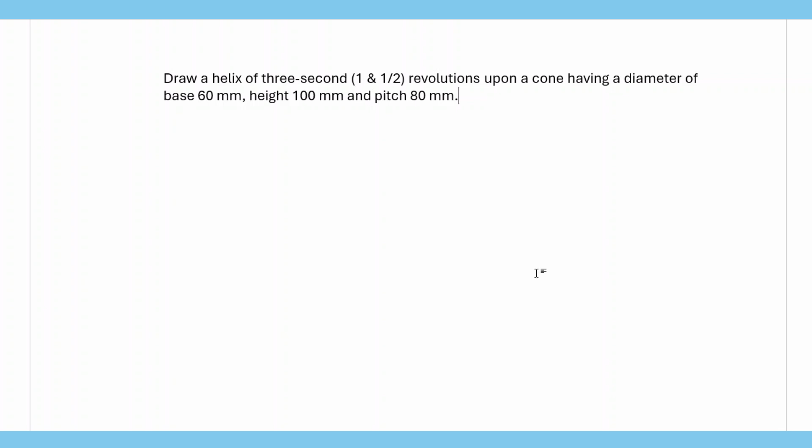So such a cone will look something like this. The base diameter, we said, is 60. The height of the cone is 100, and the pitch is the axial advance when you go through the revolutions stated.

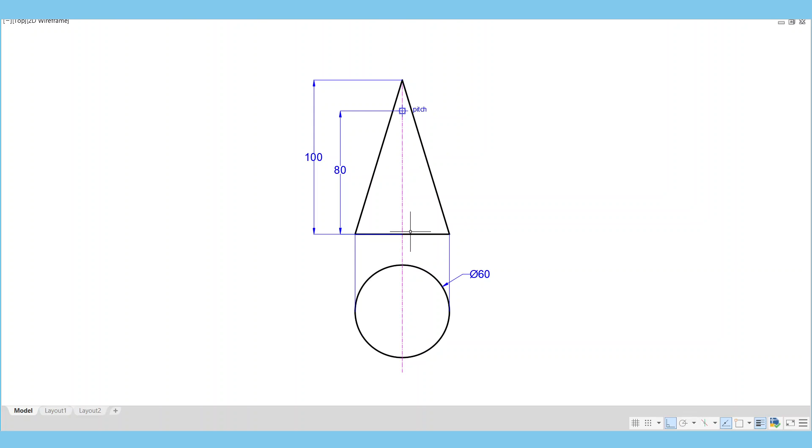In this case, our helix is not going to start from the base and end at the apex, but rather it will end at the point where the pitch, small p, is located. Very important: the 1.5 revolutions is going to fit from the base till the position of the pitch. So we can now begin.

With your compass in a radius of 30, you can draw the circle. We have the base in place, so we now can go ahead and draw the front view.

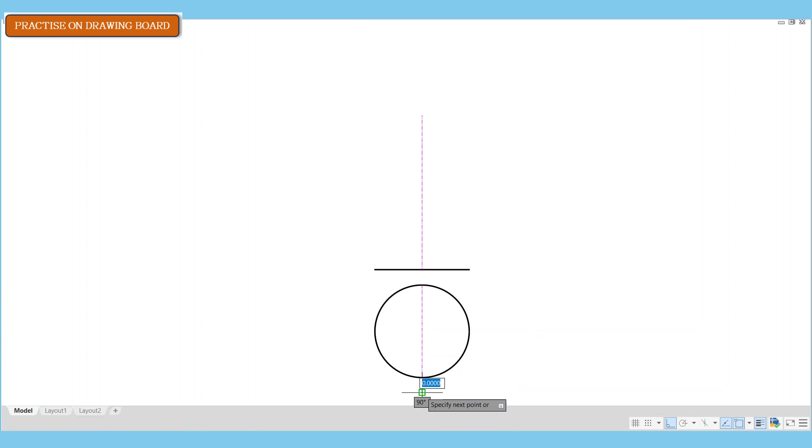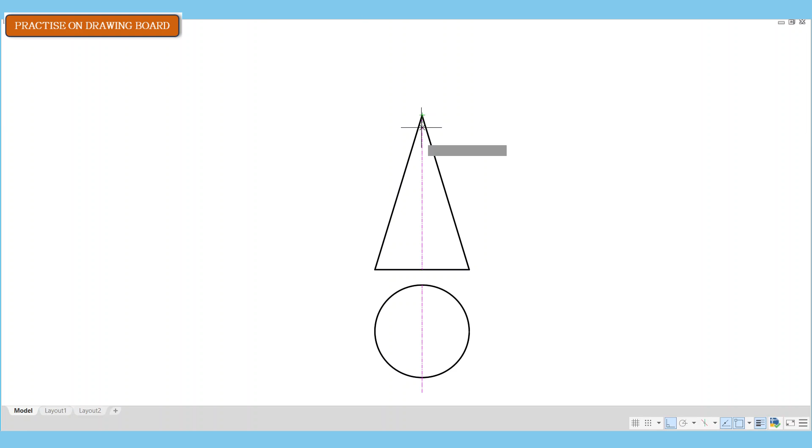Now we'll have to locate our point P. We know that the point P is 20 millimeters from the apex. So this is where our point P will be located.

So you'd see that if I measured from the apex to the point P, where P here is the pitch, that will be 20. So that's where you position your pitch.

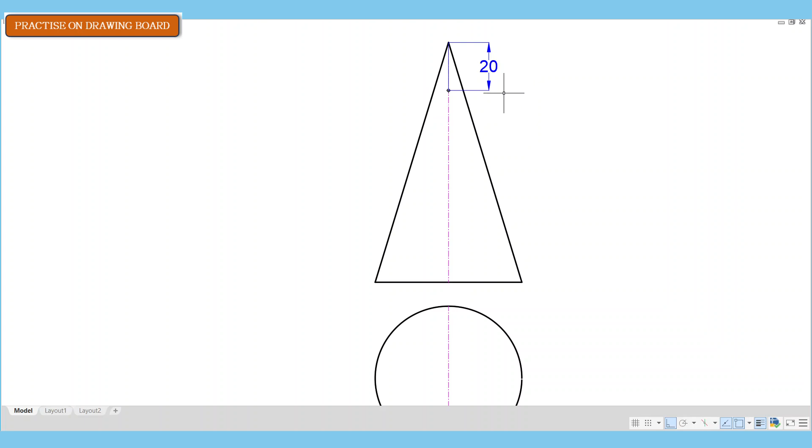So we'd go and then divide our circle into 8 equal parts. If we divided the circle into 8 equal parts, we would also have to divide our front view into 8 equal parts as well. But because we are doing a revolution and a half, I'd rather divide the circle into 8 equal parts and the front view into 12 equal parts.

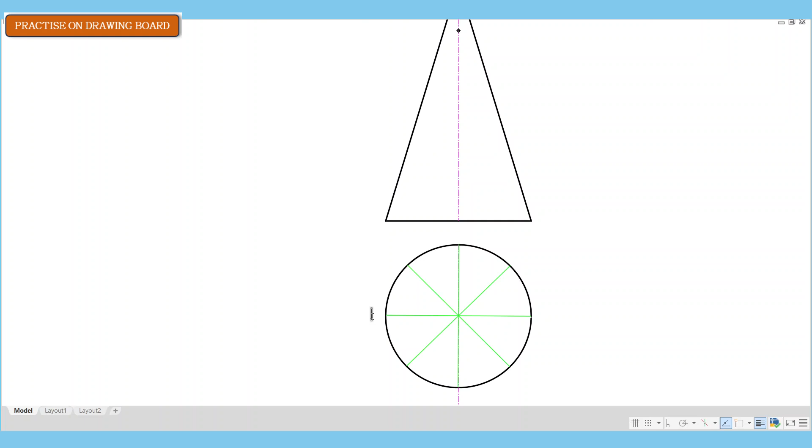Let's now label the divisions. So I have P. This is capital P for the point P, not pitch. And then I'm back to 8.

So another half revolution. 9, 10, 11, and 12. So that is my 1.5.

So we'd have to divide the pitch distance into 12 equal parts as well. Let's go ahead and do that. Now, mind you, the pitch is 80 millimeters, so 80 divided by 12 will give us 6.67 per interval. So that's what we're going to do.

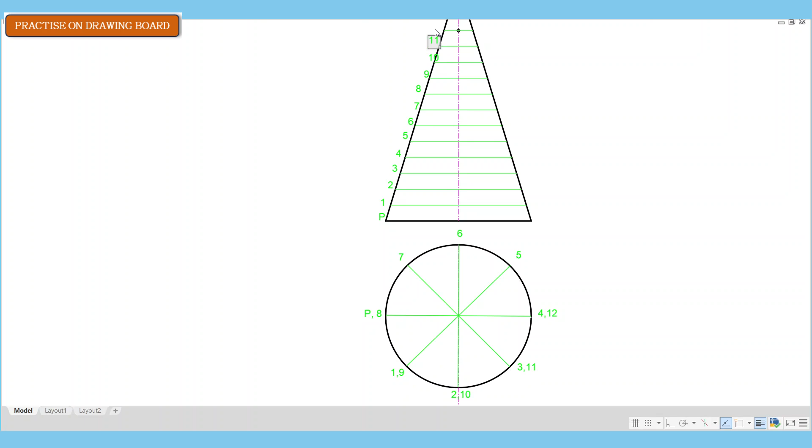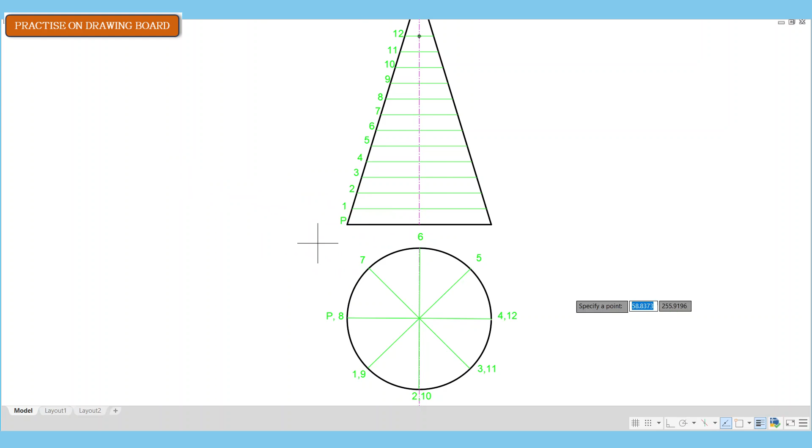And then we'll label the points, or the divisions, on the front view. So I'll locate my point P on the front view. Point P is there, and then point P on the base is also located there.

What I'll do next will be to draw my vertical lines from the base to the bottom part of the front view and then connect to the apex.

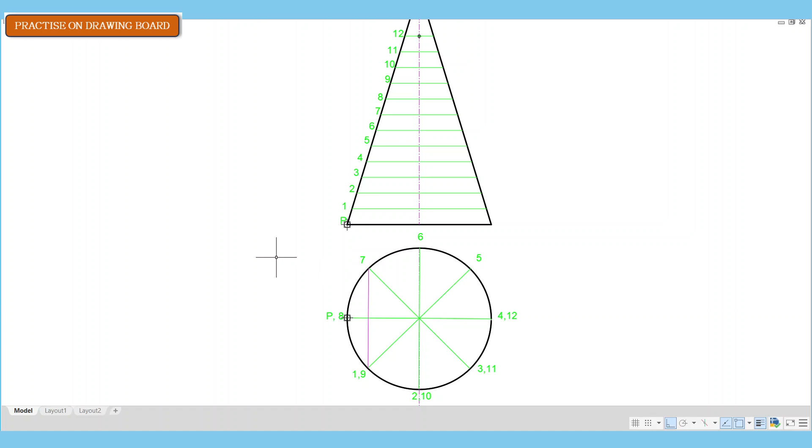So now we can locate our points on the front view, and we know that's the intersection of, let's say, the projection line. So from 1 all the way from the base, and then 1 on the front view. The intersection of those two will give us point 1 on the front view. And then from 2 to 2. So let's go ahead and put those in place.

So points 1 and 1, that will give us the first point. Then 2 and 2, our second point. 3 and 3, and then 4 and 4. 5 and 5. 6 and 6. 7 and 7. 8 and 8.

So mind you, if we were doing one full revolution, then this will be the total curve that we get. This will be our full revolution, or one revolution. So the remainder is going to be the half revolution, that is from 9 till 12.

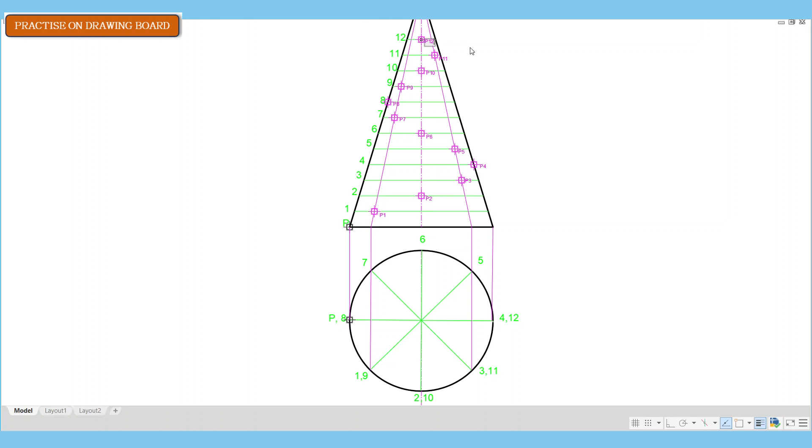So we can connect with a spline, but before we connect, we can put labels on them. So you would have to use your French curves to connect. Of course, because I'm using the software, I'll use a different approach.

And we'll do well to remember that the point 4 to point 8 is behind the cone. Therefore, this section of the helix is going to be represented with hidden lines.

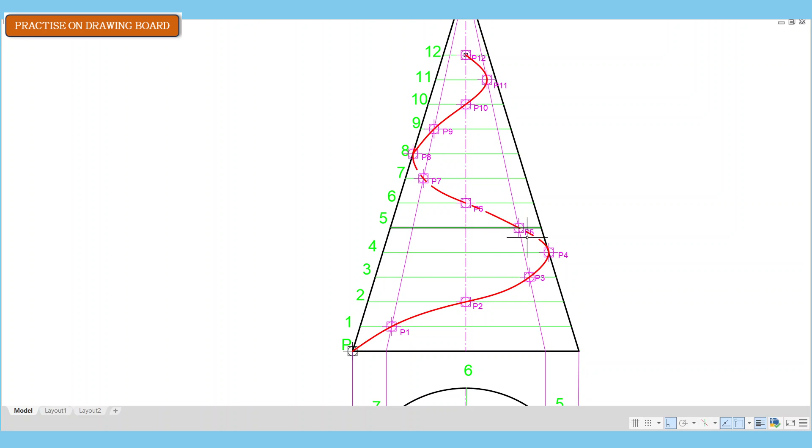Okay, so seeing as we have our points P1 to P12 on the front view, we want to draw the helix on the base, or on the plan as well, by projecting downwards the points P1 all the way to P12.

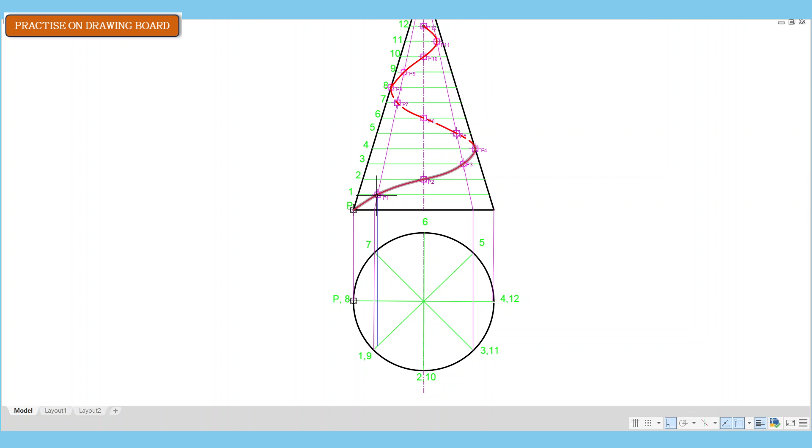We'll project point 1 downwards by drawing a line from point 1 all the way to the 1-5 divisional line on the circle. When we draw the line down from P1, it hits this divisional line, and that is our point P1.

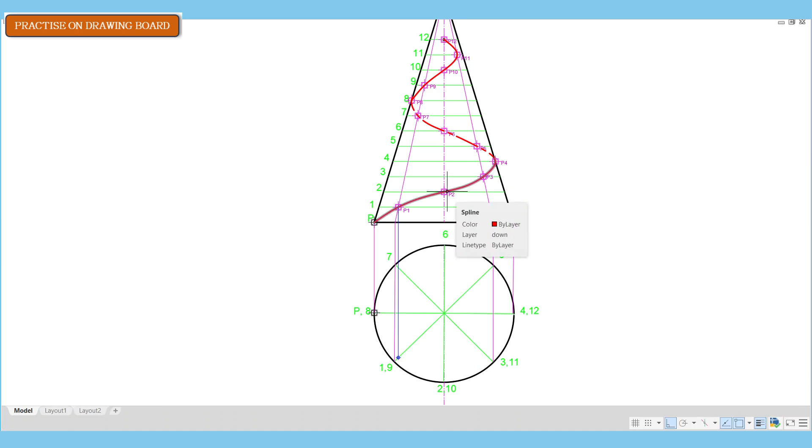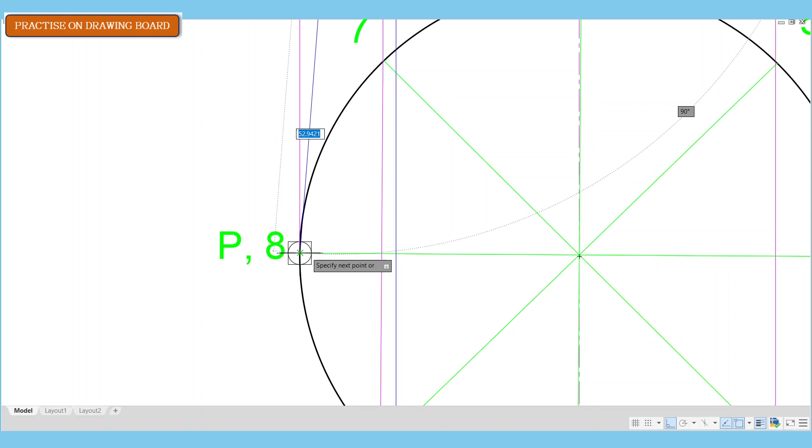For P2, we know it goes through the 2-6 line, which is vertical, so we'll use a slightly different approach. We project P2 to the generator, then draw a line from the generator until it touches the diameter. Standing at the center of the circle with our compass, we open to that point where the line hits the diameter, and draw an arc until it touches the 2 line. This will be our point 2.

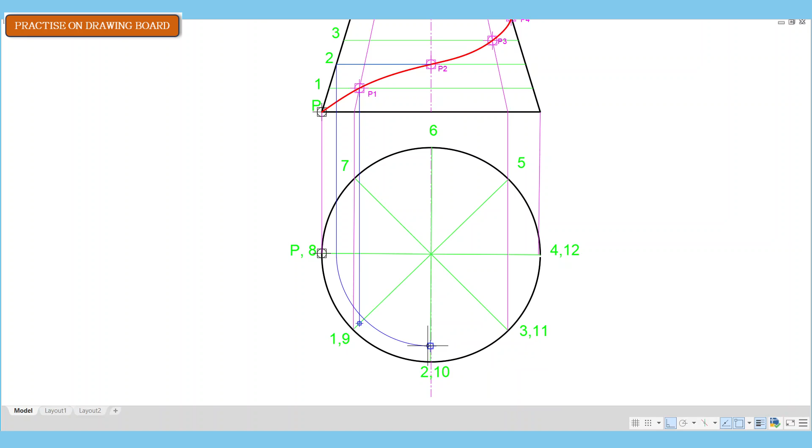Point 3 is easy. We just project point 3 until it touches the 3-11 divisional line. That's point 3.

For point 4, we do the same. We project 4 until it hits the 4 divisional line, which is this one right here. Before I continue with the next set of points, I want to label the first 4 so I don't confuse us all.

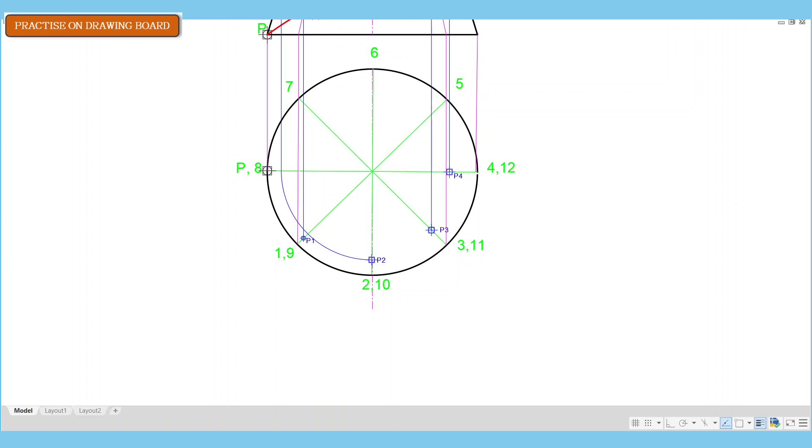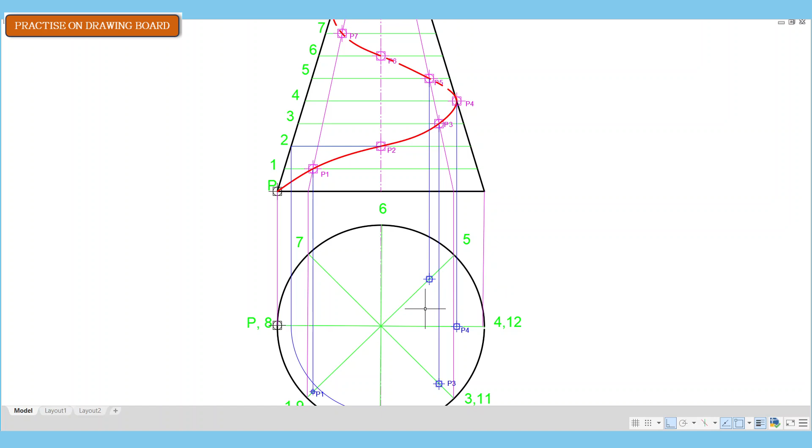From 5, we are looking for the 5 divisional line, which is that point here. So that is 5.

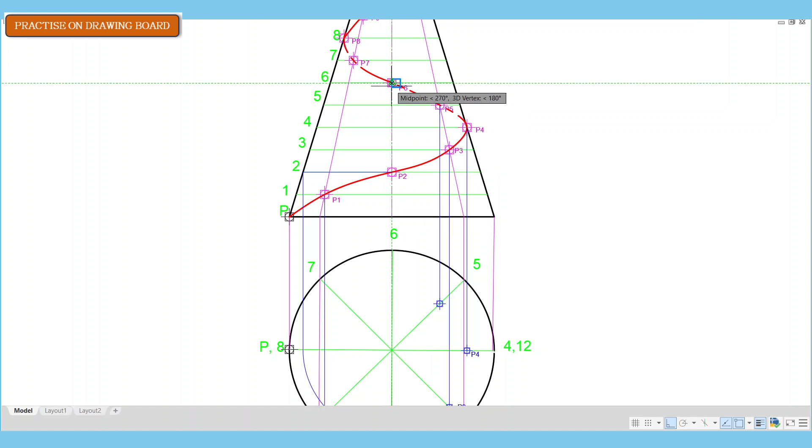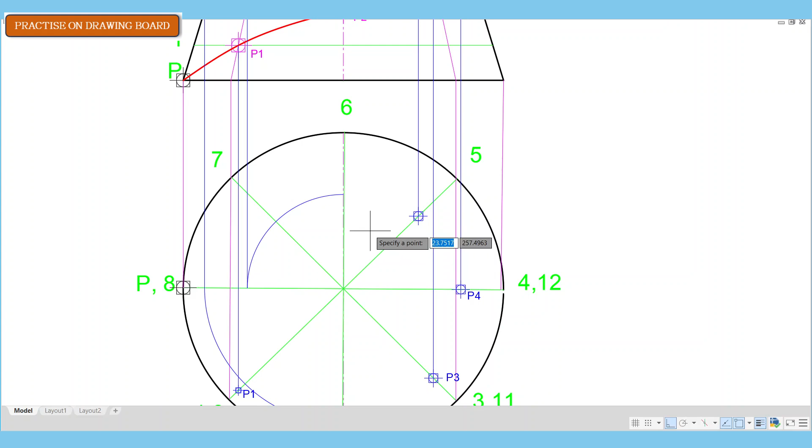Now for 6, we see it's going through the vertical line through the base, so we use a similar technique as for point 2. We project from point 6 to the generator, then all the way downwards until we hit the diameter. With a compass standing at the center, open to this point, and draw an arc, but this time going up and not down. This point here will be point 6.

Now we go to 7. We project from this until we hit the 7 divisional line, which is this point right here.

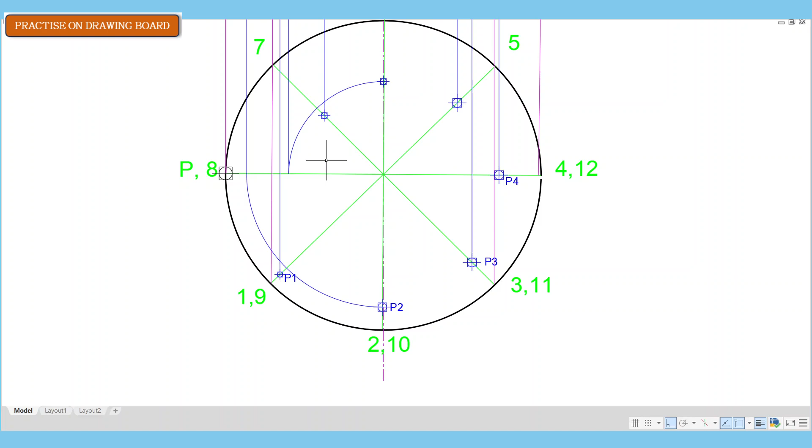And then from 7 we go to point 8. We project from 8 all the way until we hit the 8 divisional line, and that point is our point 8.

Again, before we continue, let's label the next 4 set of points that we've gotten.

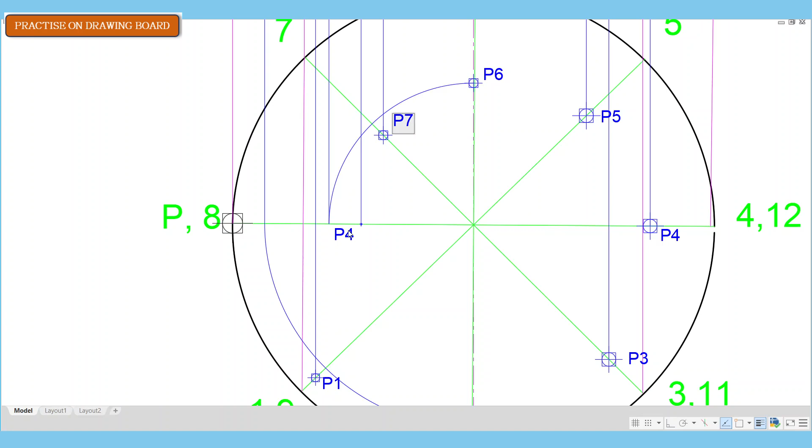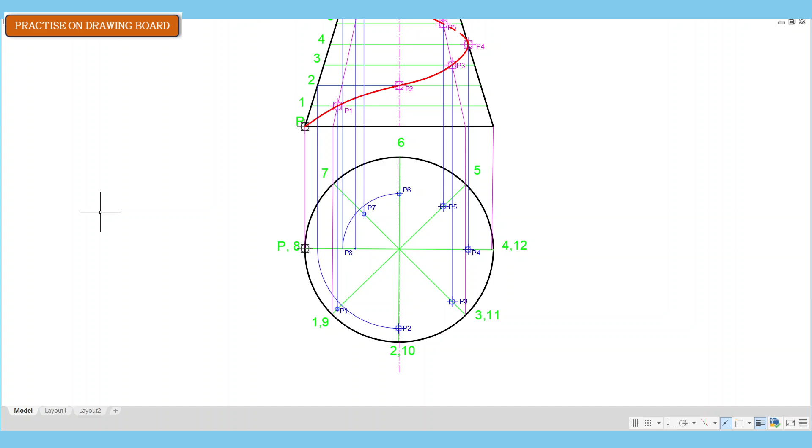Points 1 to 8 on the plan actually represent a full revolution. So we go ahead, and from 9 to 12 will be the half revolution that we have to add. Same method, but I'm changing the line to yellow just to differentiate.

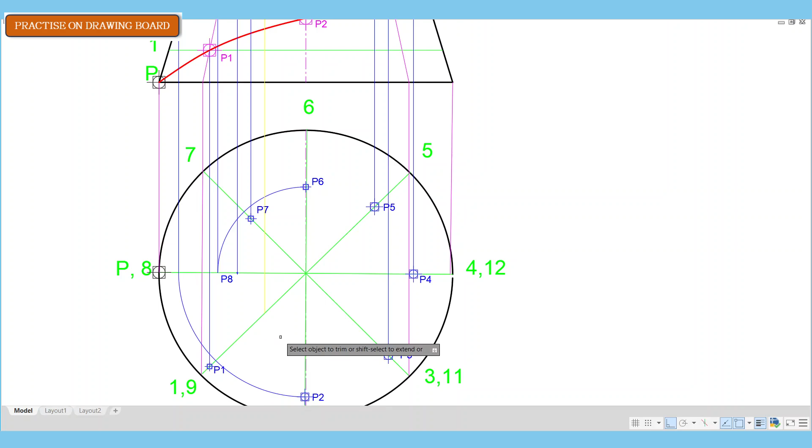From 8 we go to 9. From 9 we drop this downwards, and this is our ninth line. So that is point 9.

Now when we get to point 10, mind you, 1, 9 and 5 are on the same divisional line. So 2, 10 and 6 will be on the same, 3, 11 and 7, and then 4, 12 and 8. When we get to the 10th point, we see we are facing that challenge where the point is going through the vertical.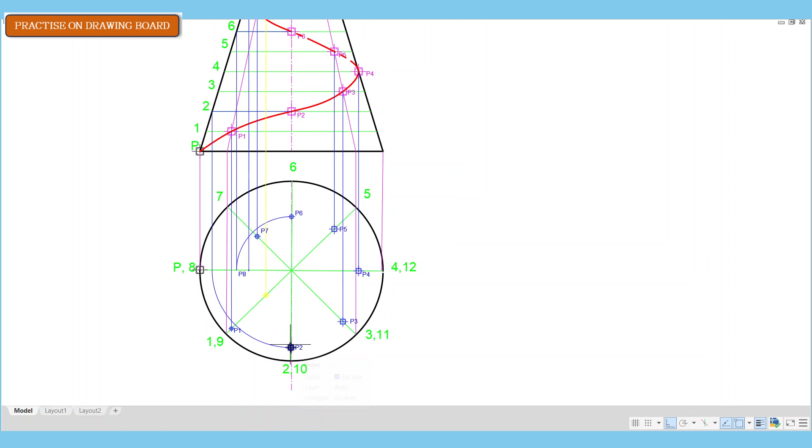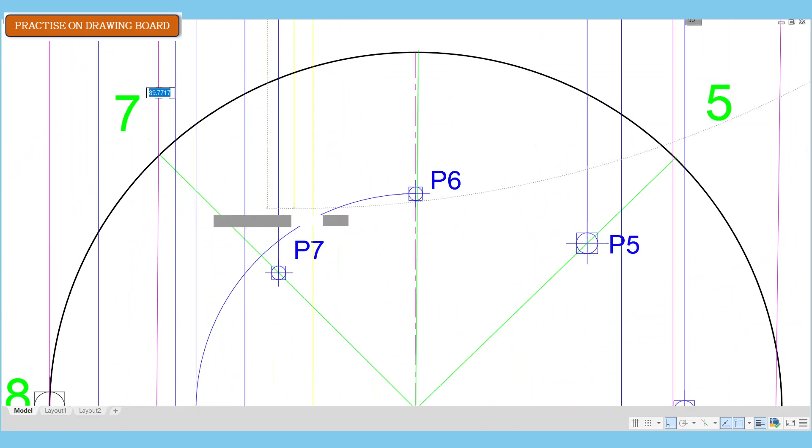So we'll resort to the technique used at 2 and 6. The line will go to the generator and then all the way downwards. From this point, then we draw that, and that will be our point 10.

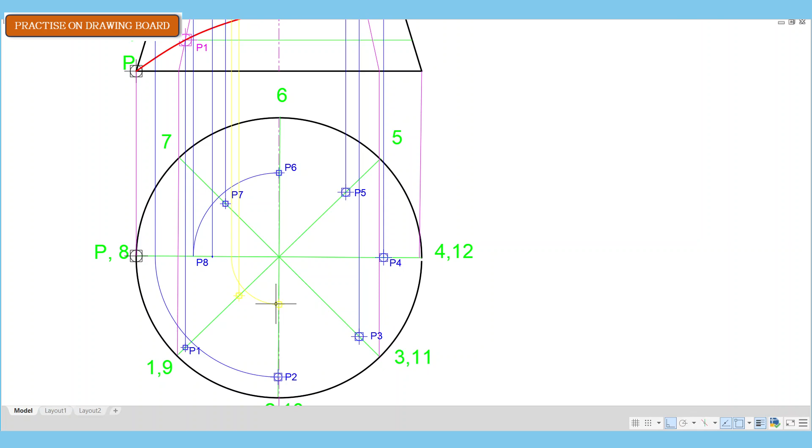And then 11. So from 11...

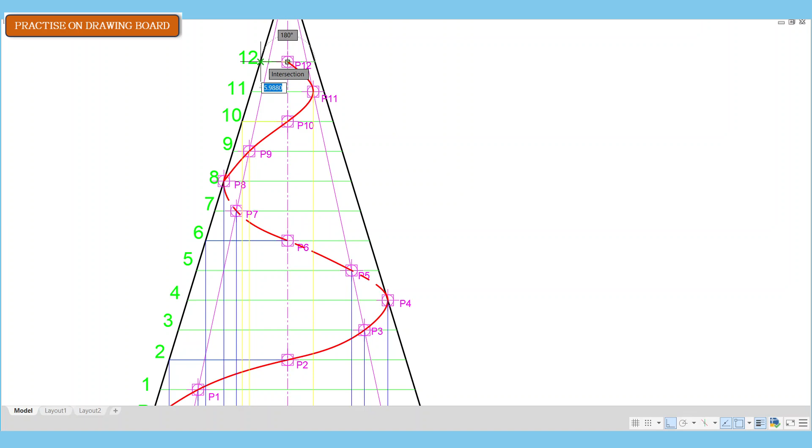For 12, because it's not at the vertex, it won't be at the center, so we have to use the same technique. From 12 to the generator, all the way downwards. Now I have a lot of lines there, so be careful not to confuse yourself. All the way to the divisional line.

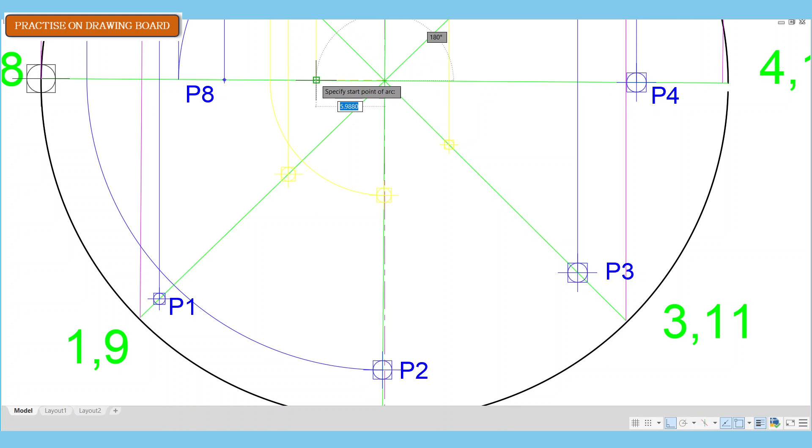Then we use our compass, stand at the center, open to where we got to, and this time we go up and not down, like that. And that will be point 12. You see that point 12 is not going through the vertex.

So let's label the points.

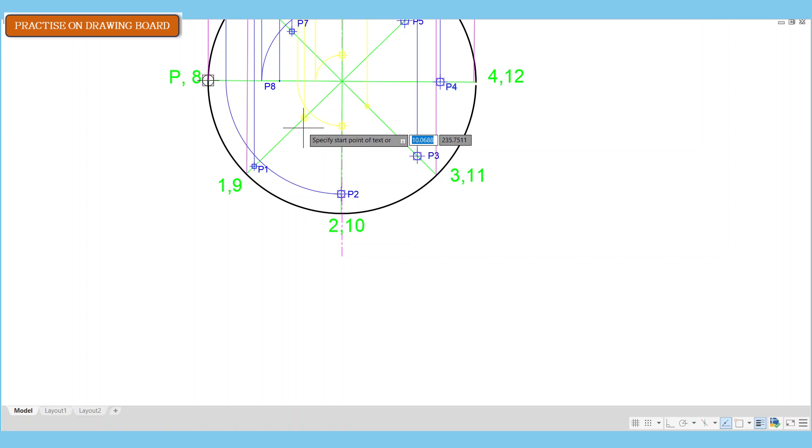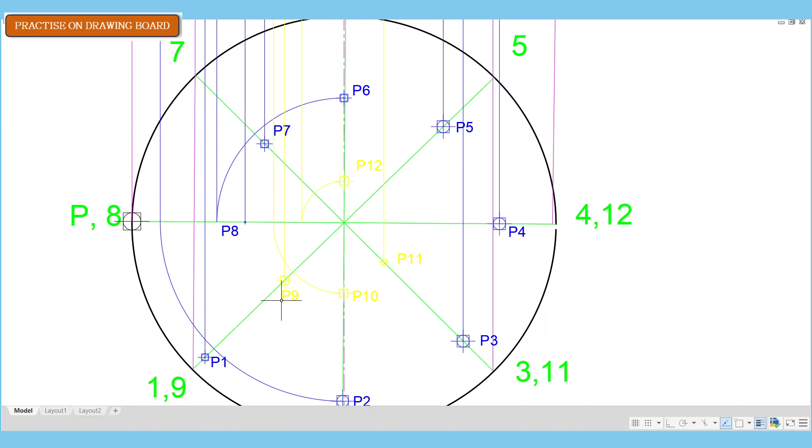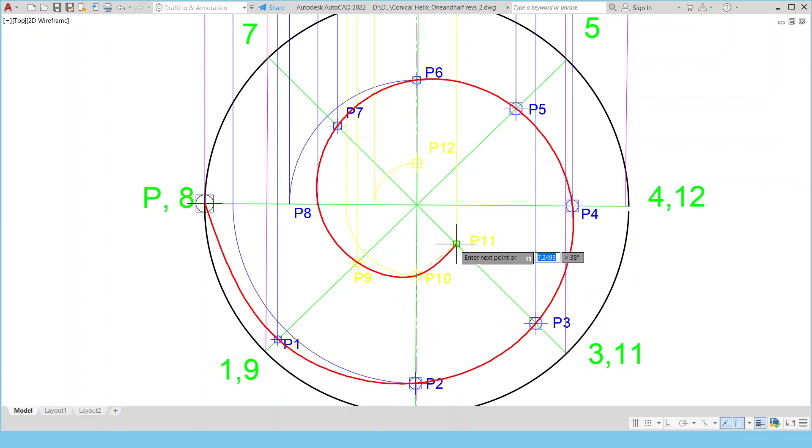Now that we have all 12 points projected onto the plan, we can connect them using our French curves, beginning from P1, P2, P3, 4, 5, 6, 7, 8, 9, 10, 11, and 12.

And that's about it. That will be our solution.